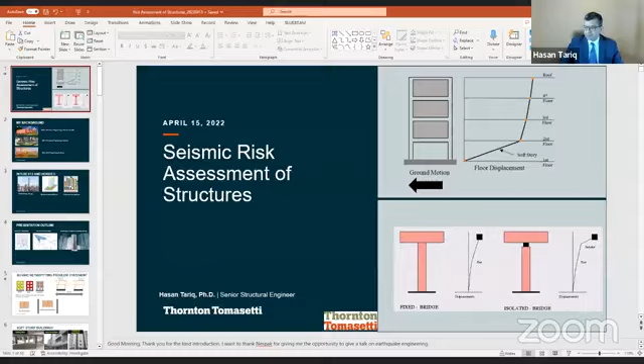I really appreciate that. I don't know if I have achieved much, but every day I think I'm learning, I'm trying to be a better engineer day by day. That's my overall goal. The topic of my presentation today is seismic risk assessment of structures.

Earthquake has been close to my heart for about the last 10 to 12 years. I remember sitting in a physics class with the professor teaching Hooke's law, and we had the Muzaffarabad earthquake back in 2005. The moment I got home, I saw all the damaged buildings, and I just prayed to God for a quick recovery.

As time progressed, I got into civil engineering and then a structural engineering program, learning more about damage-controlled buildings and earthquakes, and how important design is for improving performance and safety. I kept progressing through my master's and PhD, and furthermore my professional aspirations in structural and earthquake engineering.

So the topic is seismic risk assessment of structures. As Tahir Saab already introduced my academic background, just a quick flash here - I got my PhD from NJIT, my master's from Asian Institute of Technology, and my civil engineering undergraduate from NUST Islamabad.

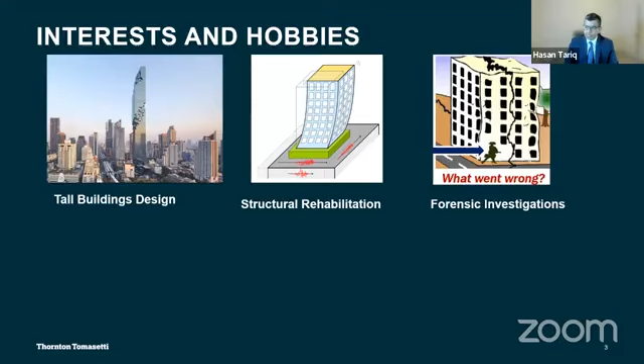So I have done work in three different departments at Thornton Tomasetti. I'm mostly engaged in the design of high-rise buildings and structural rehabilitation.

Today's presentation is divided into three main topics. I want to talk about seismic retrofitting of a soft story building, then risk assessment of base isolated bridges, and the challenges one could see in high-rise buildings. You'll see the progression as we go along the presentation.

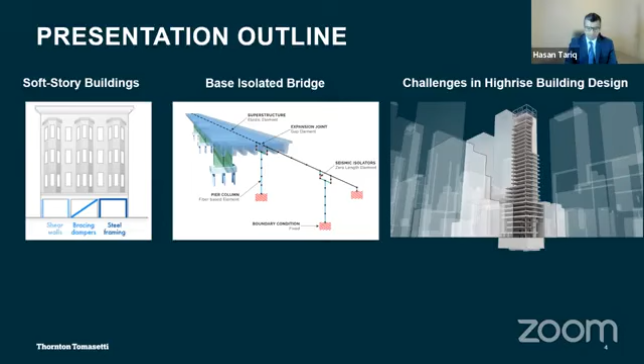So what is a soft story building? When we analyze the building - a moment resisting frame, let's say a special moment frame building - we basically consider the infill wall as a line load, and we analyze and design the beams and columns. But in reality, these infill walls have stiffness associated with them, due to which under seismic loading or earthquake, you could see an irregular distribution of stiffness along the height of the building.

Under earthquake, the irregular distribution of stiffness - due to infill walls on upper stories and no walls at the first story - causes an irregular distribution of deformation along the height of the building. The columns at the first story take all the damage, and you could see it turn into a complete collapse.

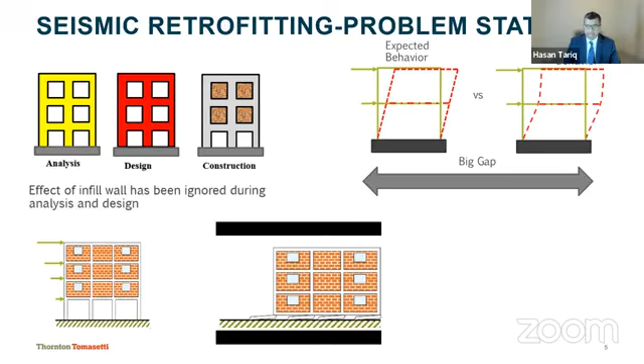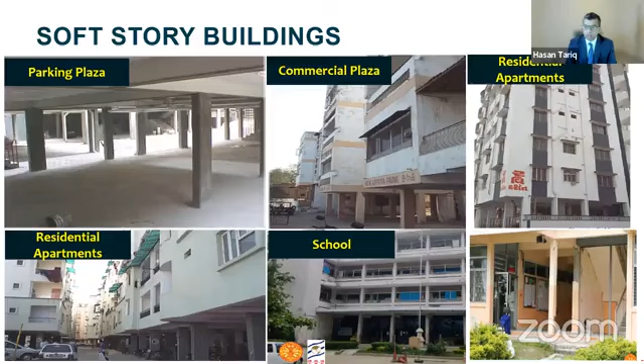Now where would we see soft story buildings? We can see them all around - commercial plazas, school buildings, residential apartments. For commercial plazas, we need the first story open for parking. For school buildings, we probably need the first story open for prayer or assembly. For residential apartments, there are leasing offices made of glass, and the stiffness of glass is much less - almost very flexible compared to the stiffness of the walls along the height of the building.

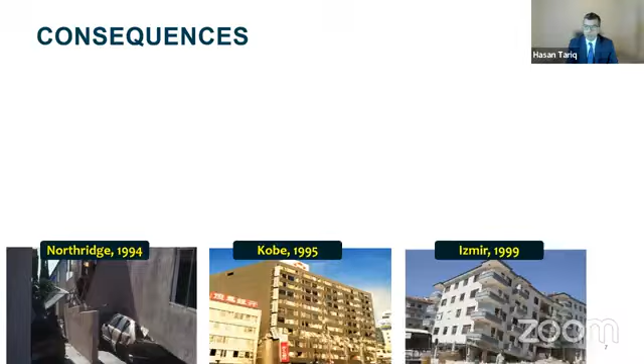Now, even past earthquakes have demonstrated that the damage due to soft story was most commonly found all around the world, which means that soft story buildings are vulnerable to earthquake and require special attention from a design standpoint.

The question is, in order to avoid the damage, should we stop constructing soft story buildings? If we say yes, we'll probably be out of business. Being a structural engineer, we need to understand the significance of the problem and how we would address it.

Soft story buildings are there. They have to be there because we can't have walls at the first story, for commercial purposes or from an architectural standpoint. So these buildings will be there. Being a structural engineer, we need to determine what we need to do in order to improve its performance under seismic loading. That's the overall idea.

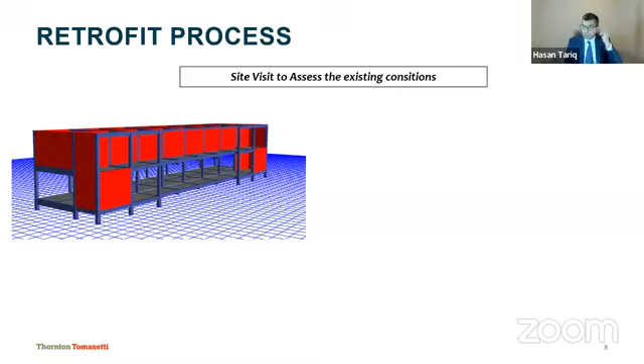Now I'm going to explain the retrofitting process. The first step, for example, if you are retrofitting an existing building, you would go to the site, take pictures, determine the geometry of the building. The second step is you formulate the nonlinear inelastic model.

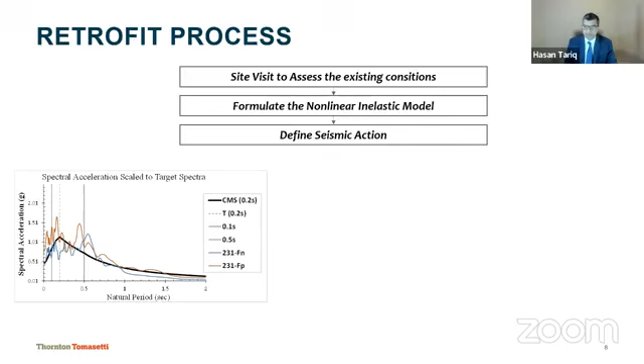The third is you determine the seismic action, which means what is the likelihood of that particular earthquake at that location. Then you determine the evaluation criteria. How are you checking your building model? Are you comparing the forces, the deformations, the strains, or the plastic rotations? You need to define the evaluation criteria.

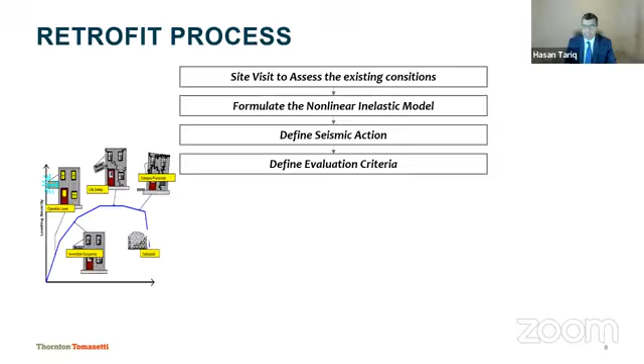And then you evaluate the performance of the case study building, and then you determine the structural deficiencies. This is a very important stage where a structural engineer will determine what retrofitting approach needs to be applied.

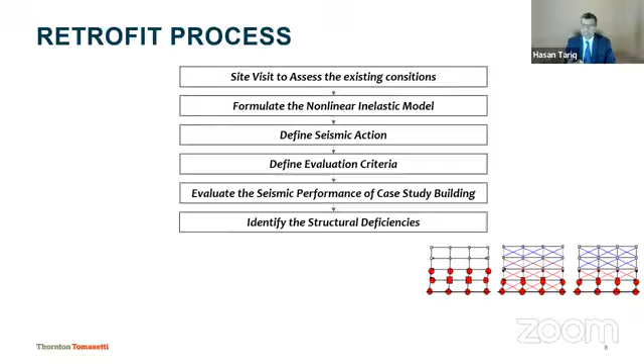For example, if an earthquake has a return period of 2,500 years and your columns only have minor yielding, meaning they're not going to collapse under the earthquake, you can't propose an expensive retrofitting approach that would over-retrofit the building and cause other damages. Here you could see in the picture that the columns have suffered plastic deformation - they're close to collapse - and that means you need to develop a certain approach that will either strengthen or stiffen the building, or both.

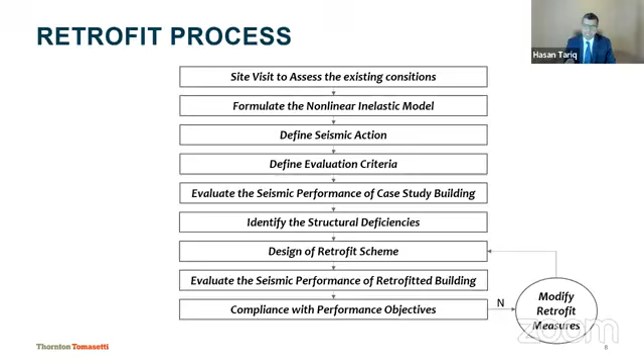Then you design your retrofit scheme based on the deficiencies of the existing building, and then you evaluate the performance of the retrofitted building and compare that with the objectives mentioned earlier. If the objectives are not being met, you reiterate until you achieve the desired objective. If yes, you proceed to the final report.

This building is located in the north of Thailand, just to give you a perspective of how far it is from New York. I worked on that building when I was working for AIT Solutions in Thailand. I flew all the way to Chiang Rai province in Thailand and looked at the existing building, which was under construction.

My question to the design engineer at that time was, if you are constructing the new building, why can't you just add walls at the first story and avoid the soft story? They said we need that first story open for prayer purposes - all the Thai students gather at that place for prayer and we can't close it. Also, you could see infill walls somewhere at the mid-height of the column, which is another topic to discuss, but you can see it can cause a hinge at that location of the column.

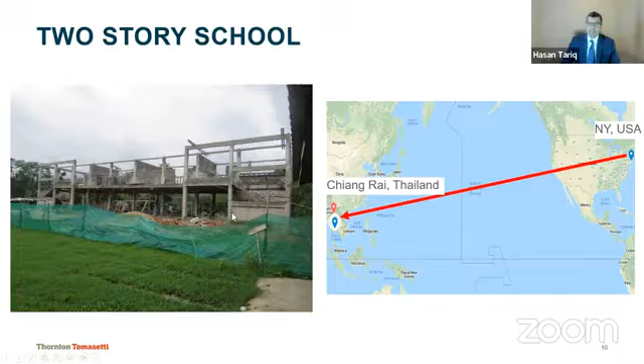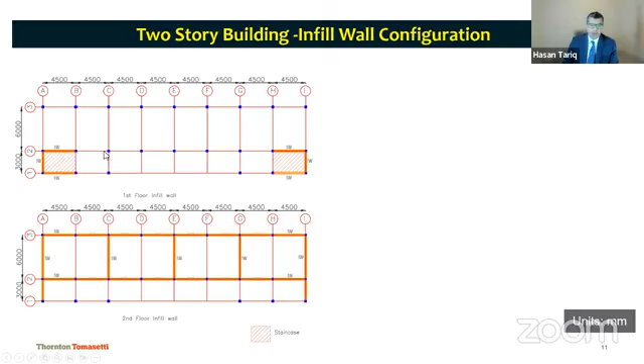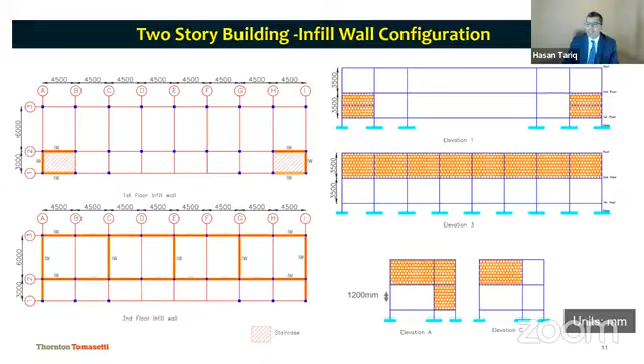Okay, so this is a plan view of that case study building. As you can see, we have infill walls at the second story all around the perimeter, and at the first story only around the stairwell. That is the elevation view on your right side, both front and side elevations, just to get more visual understanding that we have infill walls at the second story and no walls at the first story.

And then the model development stage. Once you've gathered the information, once you know the scheme of your building and what it looks like, the next step is to develop the mathematical model of that building. For this, I used Perform 3D.

Within Perform 3D, I used a fiber-based modeling approach. In that modeling approach, I assigned a nonlinear behavior to each fiber of the cross-section. At the bottom, you can see we have a cross-section fiber. We discretize that cross-section into small fibers. By fiber, I mean one small square, which is a meshing language we use in finite element analysis.

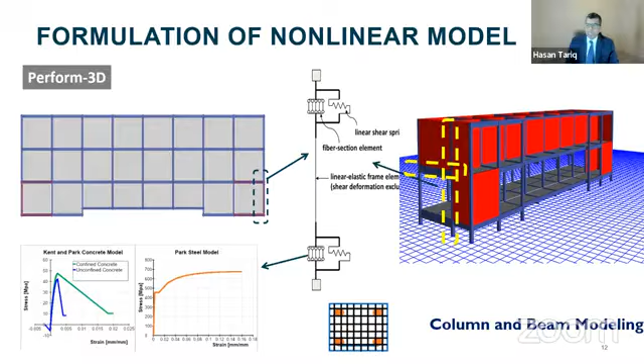Then we assign each fiber the corresponding material behavior. For a rebar, we would use a Park steel model. For concrete, we have confined and unconfined concrete material models, just to demonstrate an expected performance under lateral loading. The slabs were modeled as an elastic shell, meaning no nonlinearity was considered. The fixed support was considered at the base.

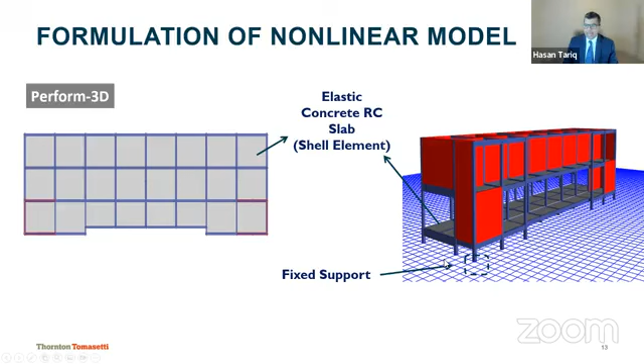In order to simulate the effect of infill walls, I used compression struts, which means if the load is applied in the north-south direction, this strut would be active and the other strut would not take any load. If the load is applied in the opposite direction, that strut would take the load and the other would not. So these are compression-only struts that take the lateral loads to simulate the behavior of CMU walls.

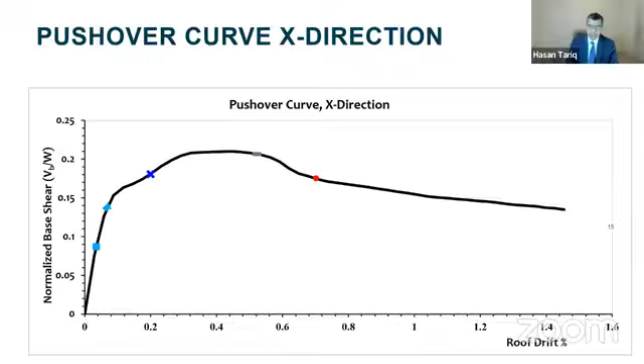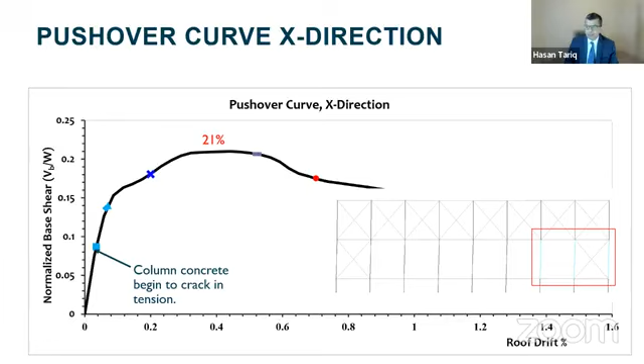This plot is a basically classic pushover behavior of the building under the X direction. These markers on the curve show various damage levels. The first marker, in cyan, shows where the concrete column begins to crack. That's expected - once your stresses exceed the cracking moment, 7.5 under root f'c, you would exceed the cracking, a very low stress level. That's one you should expect.

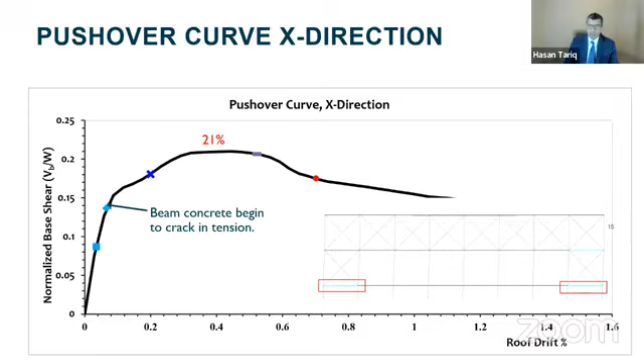The second thing to look at is that your infill walls at the first story begin to crack. The third thing is your beam at the base level also begins to crack, and then your column begins to yield. Then you would see that as deformation continues, your column begins to crush, and that's the point where the column concrete begins to spall, leading to a complete collapse.

One interesting thing to look at in this picture is that there is no damage at the second story. There is no cracking of the wall, no cracking in the beam or the column, which means that once your wall cracks and the columns are left by themselves, all the deformation concentrates here, and we have a typical soft story behavior.

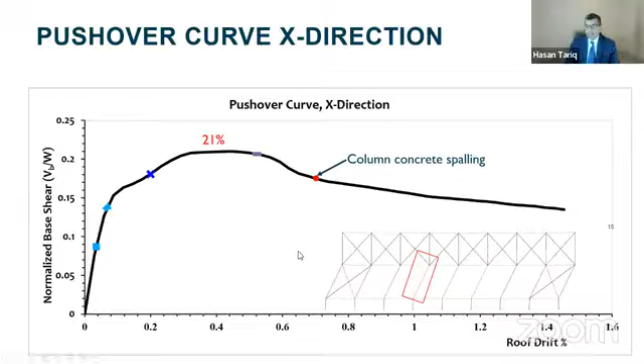Another way to look at this is to validate your expected damage along the building as you exceed your drift levels. This curve also has its own significance - here I am comparing the behavior of the building with infill walls and without infill walls. This is basically to emphasize that when we analyze the building, we do not consider infill walls, but when we do add buildings with infill walls, there is an increase in stiffness, which in return will reduce your natural period of the building.

And as per your response spectrum, a lower period will attract more shear. If you have a soft story building with infill walls, that higher shear demand will definitely cause the collapse of your first story columns. That's another way to look into it - the importance of not ignoring the infill wall, which can lead to a disaster at the end.

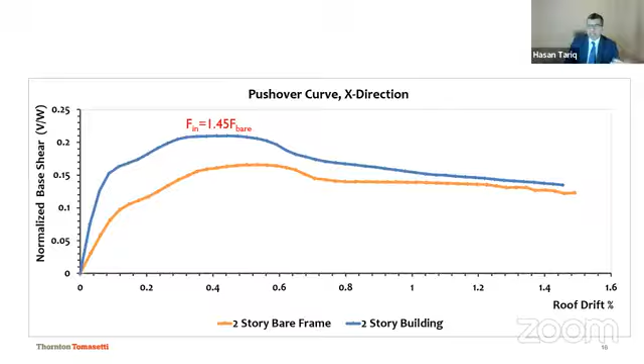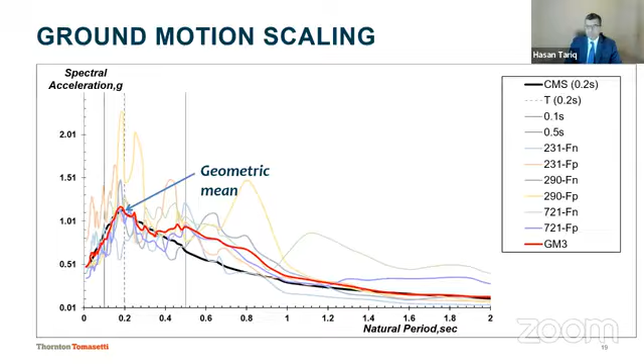Then we selected the suite of ground motions - we have fault normal and fault parallel. What we basically did was scale the frequency of these selected ground motions such that the geometric mean at 0.2 seconds coincides with each other. The reason we chose 0.2 seconds is because it's a two-story building, and 0.2 to 0.3 seconds is the natural period you would expect, and we wanted to have resonance at that time. That's the period we chose from the scaling standpoint.

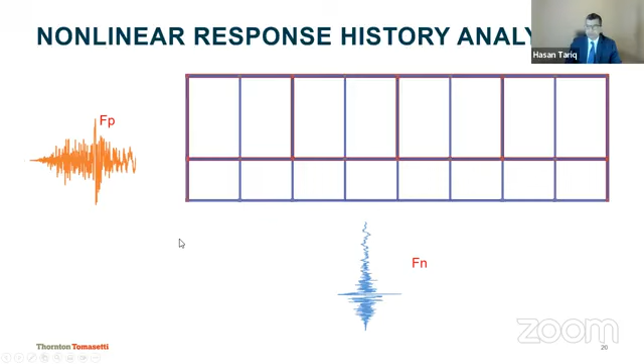What we did is we took the envelope of all the load cases, and the maximum from all load cases was considered as the demand. 5% modal damping and a small amount of Rayleigh damping were also considered.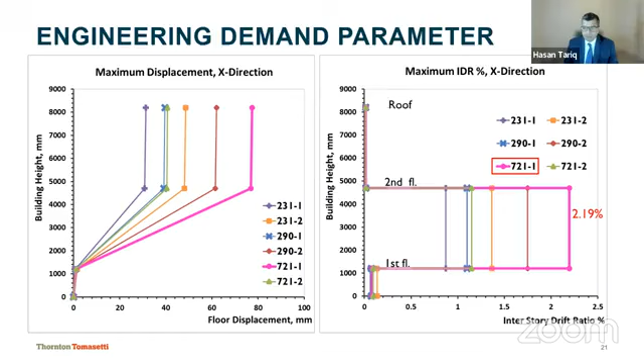From the drift standpoint, you can see that all the deformations are concentrated in the first story, and the drift at the second story is almost zero, meaning the columns at the first story are taking the whole load, which is causing the collapse of the whole building.

We also looked at the plastic rotations of the columns. I did mention that I used strain models, but I also compared the plastic rotations. I converted my strains to curvatures, and from curvatures to rotation—it's a simple mathematical formula that one can easily relate.

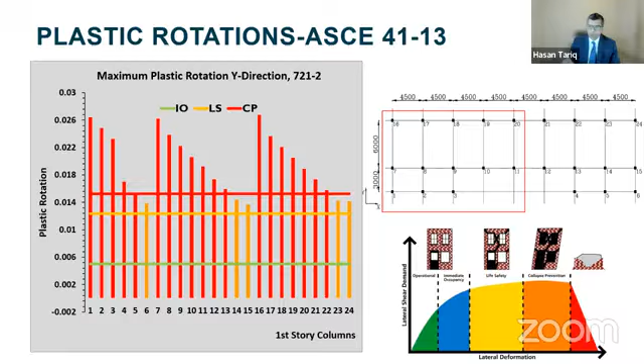The red line shows that all the columns have crossed the collapse prevention limit state, and on the plot on the right side, you can see they entered the collapse region. A few columns were in the collapse prevention limit state, and none were in life safety or immediate occupancy. In short, almost all the columns at the first story suffered collapse under the selected ground motion.

Now, what is the takeaway from my evaluation? I found that the building behaved poorly in the X and Y direction. Why? Because of the irregular distribution of infill walls along the height of the building.

The second finding was the plastic rotation of the first story columns exceeding the plastic rotation limits stipulated in the codes under jurisdiction.

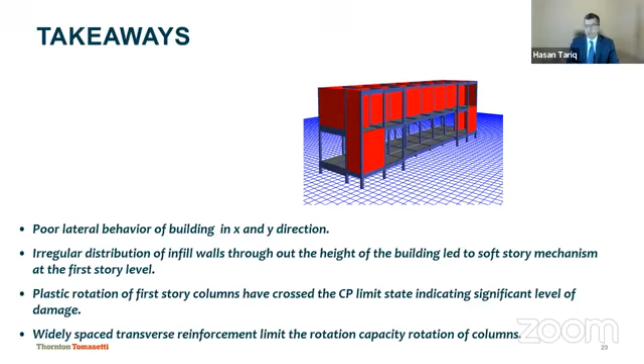When I calculated the plastic rotation, there is a role of transverse reinforcement, which basically confines the core of the concrete and improves the plastic rotation capacity. I also noticed that in the plastic hinge regions, the spacing of the transverse reinforcement was not enough—improving that could improve the rotation capacity of the columns.

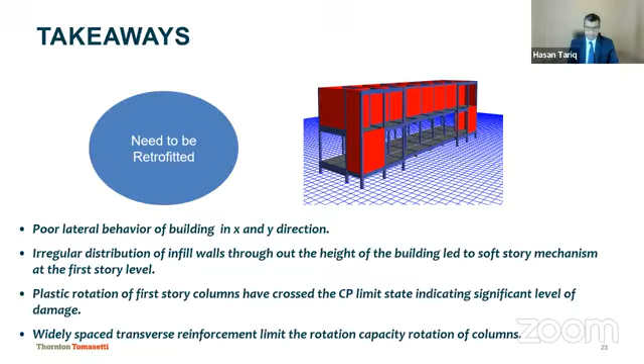So what's my final conclusion? The building needs to be retrofitted. There are many retrofitting approaches available that could be used to improve the building performance under earthquake forces.

One is the global retrofitting approach, the other is the local retrofitting approach. Depending upon the desired performance objective, one can select any approach to improve the performance of the building.

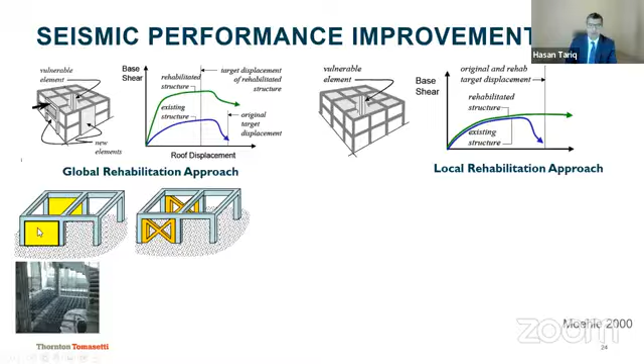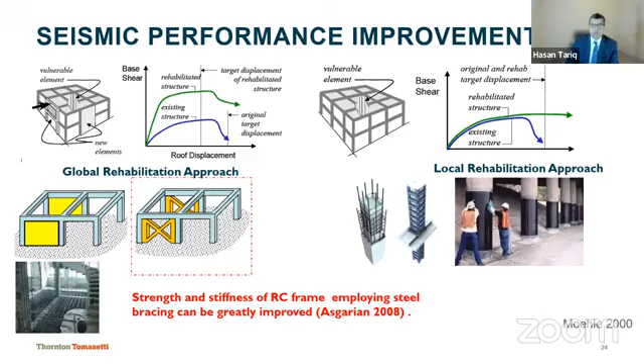In the global approach, we can have infill walls or concentrically braced frames, and in the local approach, we have concrete jacketing, FRP wrapping. We found that braces have enough strength and stiffness and can be used to improve the performance of the building, making it a more viable approach compared to other global approaches.

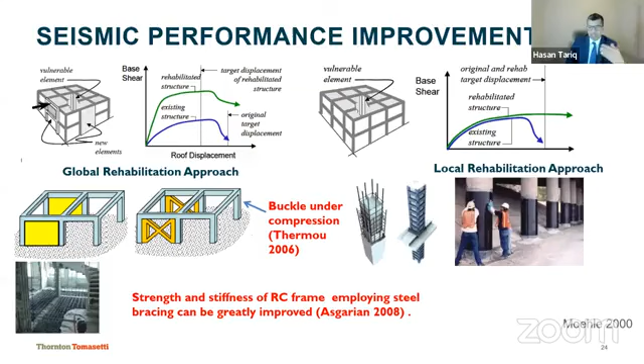Among the braces, one of the biggest issues is that braces will buckle under compression. Under yielding, it's simple—Fy times Ag multiplied by a factor gives the expected tensile strength. But under buckling, if the critical buckling load is less than the yield strength, the brace will buckle under compression, which would defeat the purpose of retrofitting.

So from that standpoint, what should we use to improve the performance of the building? I'm going to talk about buckling restrained braces. That was my master's thesis research—I developed a design methodology which I actually used to retrofit a building in the north of Thailand.

Now, the design philosophy. The question at that time was: what should be the area of the core? What should be the configuration of the core that we should use to achieve the desired objective?

The idea was we can't add a lot of strength at the first story, which could cause over-retrofitting and move the damage to a second story, potentially causing a collapse again. We need a certain level of damage, a uniform distribution along the height of the building, so we can dissipate the energy under seismic excitation.

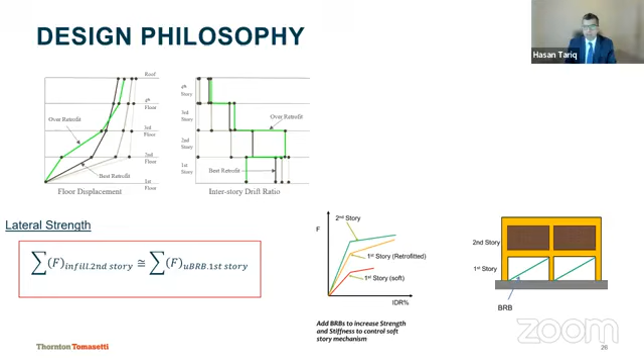From the bracing standpoint, code says you have to have at least 2 bays of braces in each direction, such that removal of a brace does not cause a reduction in capacity by more than 33%. So there were some code nuances and design approach considerations there, and another way to look at it is that we can't make the brace too soft or too stiff.

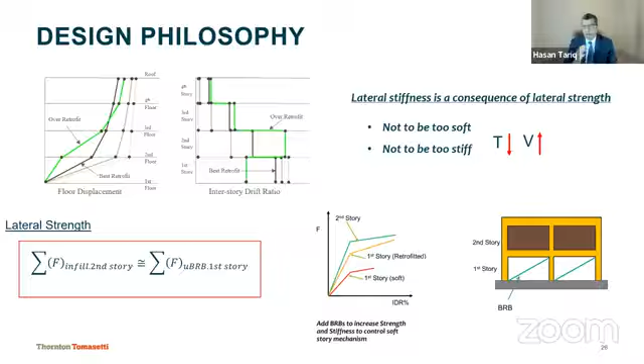The seismic design principle of that building was using the brace, because braces have higher energy dissipation capacity. But for the brace to take that capacity, I need earlier yielding of the brace, so that once it enters the inelastic region, all deformation goes there and my columns stay elastic. That's the seismic design principle.

From there, I installed the brace in an inverted V configuration on the east and west elevations, and a diagonal brace configuration on the north and south elevations.

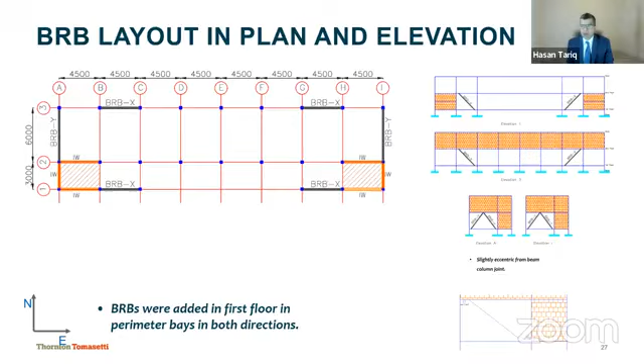I attached the brace at a certain distance away from the beam column joint, because at that location the beam column joint was not well confined. I wasn't interested in inducing more shear into the joint — if I'm saving the column, that could cause the collapse of the joint, another brittle failure. So I moved my brace a distance E away from the face of the joint, to avoid transferring large shear and tension into the column. That was the overall approach.

Here I'm comparing the story drift of two building models, one with a brace and one without. The presence of the braces significantly reduced the deformation demand in the first story building columns. On the right, you see the plastic rotations, where all columns reached plastic rotation less than the immediate occupancy limit. That means if an earthquake hits that site, the building reaches immediate occupancy — you can go back in, there's no damage, and you don't even have to repair it. That's the physical way to demonstrate the results to the client.

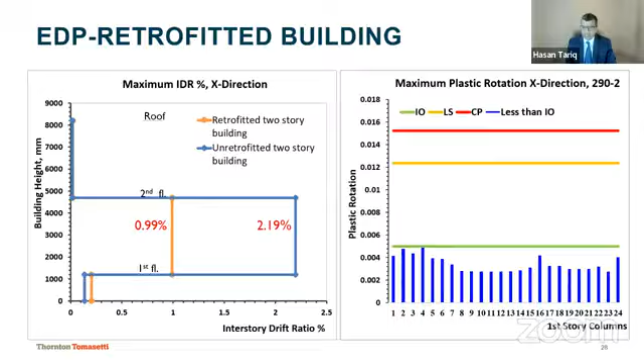The analysis didn't stop there. Because of the presence of the braces, we are adding a lot of shear into the foundations and beams. We checked that sequentially to determine if saving one thing causes a sacrifice elsewhere. We don't want that — the client doesn't want that, no one is interested in that.

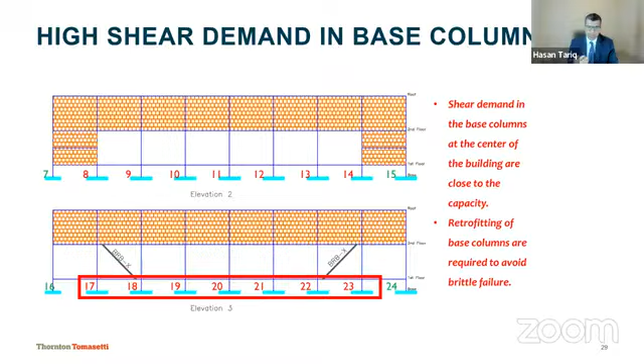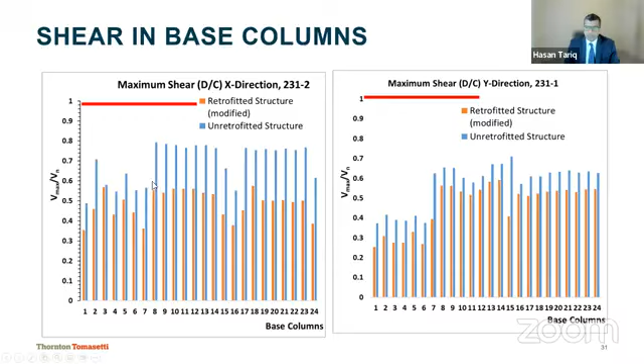I found that due to the presence of the brace, I'm adding a lot of compression and shear into these columns. We need to improve the shear capacity of these small columns below the grade beams by adding a concrete jacketing approach. I compared the shear demand-to-capacity ratios of all the columns below the grade beams, showing that in the unretrofitted building these ratios were significantly reduced by using the retrofitting approach.

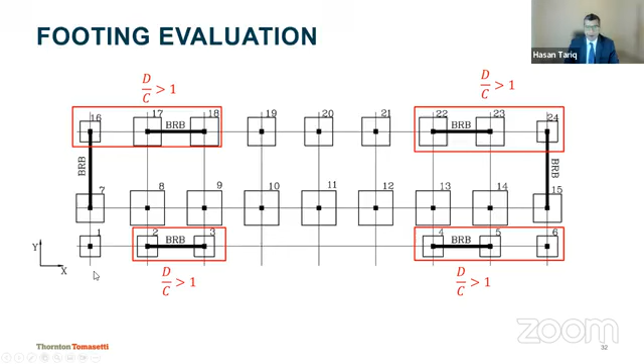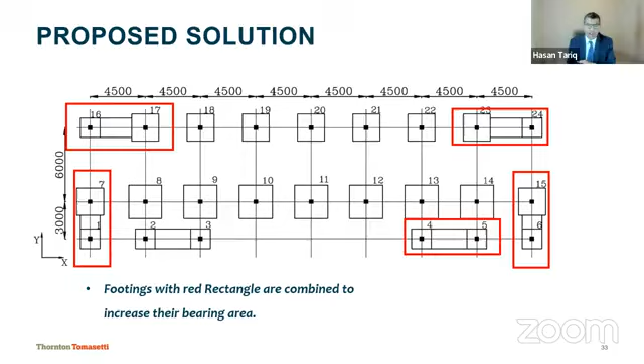I also checked the foundation, and my foundations were failing in bearing. I proposed using strap beams to connect the foundations, which increases the bearing area. That improves the demand-to-capacity ratio and the factor of safety against bearing and overturning failure, since you have uplift on one side and compression on the other, causing a triangular distribution that could uplift the foundation. If the column is saved but the foundation fails, no one wants that.

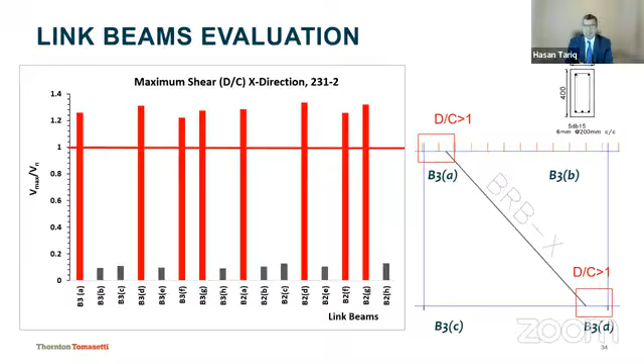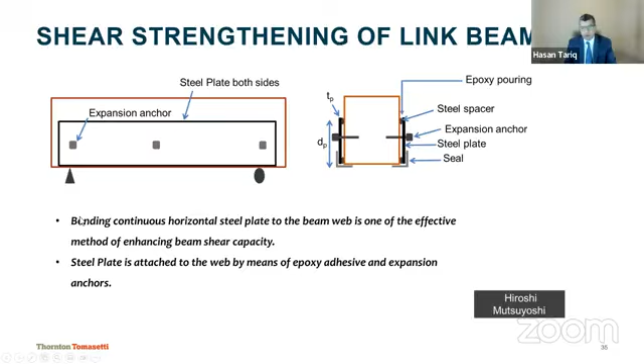The last step was to check whether the beam where I'm attaching the brace has enough shear. As you can see from the plot, the shear demand to capacity ratio of the beam was exceeding due to the presence of the brace. So we proposed having a steel plate on both sides of the beam and connecting that brace using expansion anchors to improve the shear capacity of those beams. And that's the wrap, that's the final takeaway.

As you could see, I installed the steel plate at the portion of the beam to improve the shear capacity there. I added the brace to avoid a soft story failure. I then retrofitted the columns below the grade beams to improve the shear capacity, and similarly reinforced the footing in the vicinity of the brace to improve the bearing capacity as well. So that's the overall retrofitting approach I adopted for the soft story buildings.

Okay, so that's a stopping point. Next, I'm going to move to a different topic, the collapse assessment of the base isolated bridges.

Okay, so that's the second topic. That topic is not a typical design, and not an existing building. It's basically related to a forensic investigation. What happened is related to a base isolated bridge located in the XYZ part of the world, because when we work on these projects we sign an agreement that we cannot disclose the location or the name of the parties.

As you can see on the top left, I'm calling the contractor. On the top right, I'm calling the structural designer, who is the engineer of record. So what is the story? The contractor found that the structural engineer made a significant amount of mistakes in the design of the bridge piers, meaning these piers could collapse under earthquake. That claim was filed, and the contractor requested a significant amount of design change, or an increase in money if they chose to improve the design themselves.

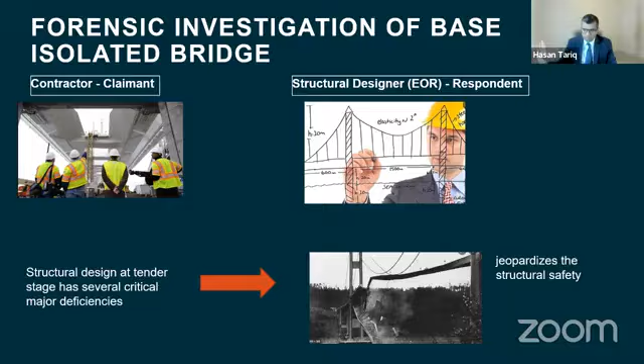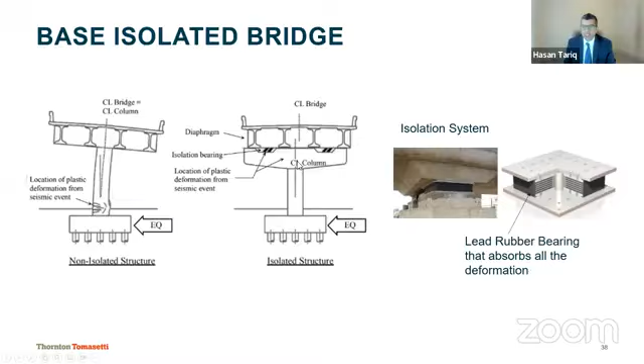So what's the nuance of this problem? A quick definition here so attendees can understand what a regular bridge and a base isolated bridge are. In a non-isolated bridge, you would displace the bridge pier under lateral loading and expect plastic hinge formation at the base of the column. The design standard would say to add closely spaced transverse reinforcement for a ductile mechanism. In base isolated bridges, the column stays elastic under seismic loading, but we add bearings below the superstructure so there is no deformation in the columns.

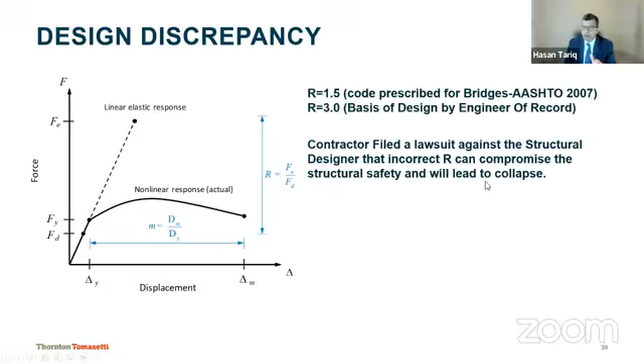The contractor found that the structural engineer designed the bridge pier against an incorrect value of response modification factor, R. This is an important design parameter for seismic design of buildings and bridges. Higher response modification factor means the building or bridge has higher ability to dissipate energy. The contractor found the design engineer used an incorrect value of R, where the bridge code says you cannot exceed 1.5 for a base isolated bridge. The contractor filed a lawsuit against the structural designer, saying that this incorrect value of R would compromise structural safety and could lead to collapse.

That drawing came to my team. I looked at the drawings, I looked at the analysis model, and then I chose to adopt the risk assessment approach to determine if the contractor is saying that if we construct that bridge with an incorrect value of R, whether this bridge will collapse, yes or no. I chose the probabilistic approach to find out the answer.

Let's dive in. I selected 80 ground motions for that particular site, developed an inelastic mathematical model that can capture all the important aspects of that base isolated bridge, and then I scaled the intensity of each ground motion such that it reaches the collapse level.

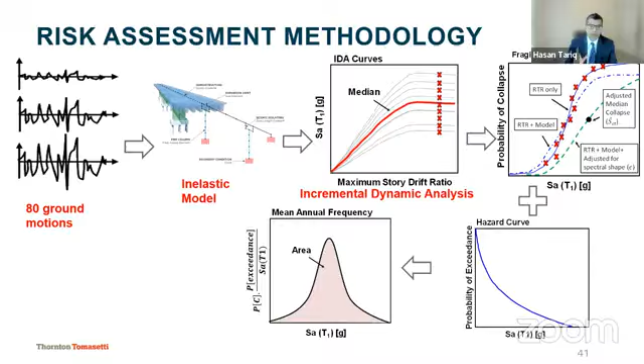So based on my fragility curve, I found that the bridge's probability of collapse is less than 1% under an earthquake with a 2,500 year return period, which means that if that bridge had been constructed with the design the engineer used, the bridge would never have collapsed. So that was my finding.

And the takeaways are: the opposing expert argued that the piers were at risk of collapse. He has effectively chosen performance limits that were inapplicable to the bridge piers. To conclude that a code deficiency is equivalent to collapse risk is to ignore the degree to which a structural element may be deficient.

Now, I'm not saying that if your design engineer or your younger staff found that my Mu is greater than φMn and you go to your boss and say, Dr. Tariq said the building is not gonna collapse, you should not avoid that.

But I'm saying that you should supplement your analysis with performance-based analysis using earthquake seismic ground motions, and then determine what is the risk of collapse. And from there, I found that the bridge is not going to collapse and has significant reserve capacity.

Of course, if that structural designer designed for lower lateral forces, he also provided the plastic hinge and detailed the plastic hinge locations of the pier such that they could take all those seismic excitations. So the end result: the case was settled, we won, and the adjudicator liked the approach we adopted.

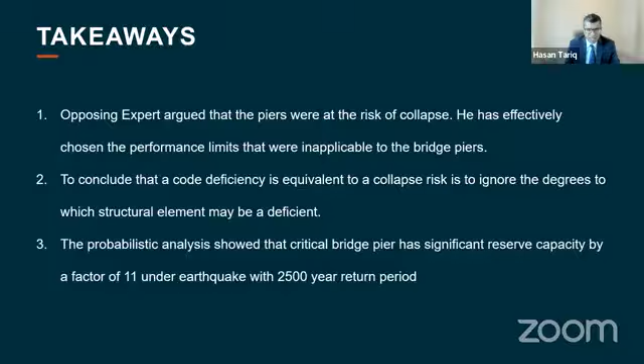Okay, so I'm gonna move now to the next step, which is basically the challenges in a high-rise building. Now, this is not related to earthquakes, but it is related to more of a challenge.

So again, I'm bound not to disclose the location of the building. One day I will, once I go there and take pictures and my name would be there. But I'll say it's a building that has started construction, located in New York, Manhattan. It's a building unique in its own ways.

The unique way is that the owner of that building wanted the building to be exposed. What that means is there will be no false ceiling that can let your pipes go through. The columns' concrete will be exposed. You will see the classic feel of your concrete with the friction. And of course, it has many other challenges.

If you have no false ceiling, that means all the MEP penetrations will happen within your beams. And if you are taking the block of concrete out of your beams, that's going to reduce the stiffness at that location. There are stress concentrations and the beam can fail down there as well.

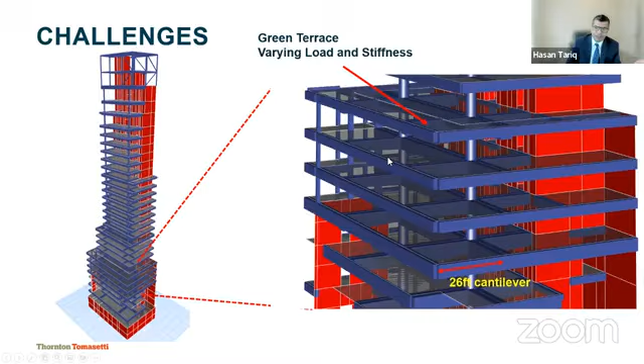That's another way to look at how our cantilevers were significantly high. One could say the stiffness is 3EI over L cube, which causes significant deformation. Also, the loads were very high as well.

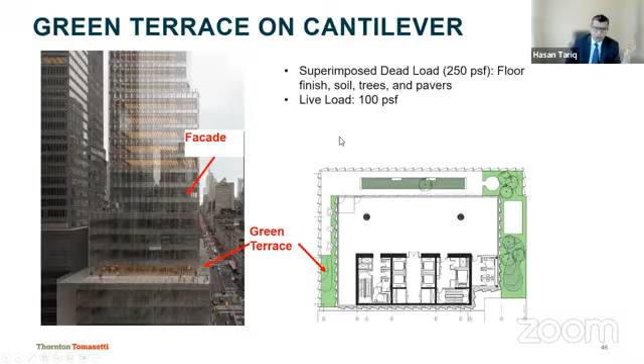So what was the challenge here? The challenge was basically the joint size of the facade.

What is a facade? As we know, probably in Islamabad, in Blue Area, the Ufone Tower or Saudi Pak Tower, and many high-rise buildings, you'd see glass panels on the perimeter. The contractor attaches those glass panels to the structural elements and has to accommodate a certain level of deformation within that joint. He doesn't want to increase the joint size because he wants people to see the shiny glass. If you're walking or driving by that building, you'll see exposed things and fancy lights, and you'd think this is such an amazing building, you want to walk inside or maybe buy an apartment if your wife convinced you to. So it's an architectural thing here.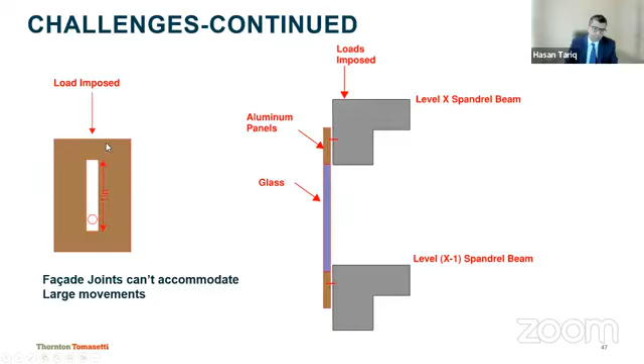That's the size of the joint. As you could see, the joint size was 1 inch, and we had a significant amount of deformation exceeding that joint size. That means it would cause damage to the glass - the glass would fall off the building because the deformations exceeded the size of the joint, which would cause failure of the facade.

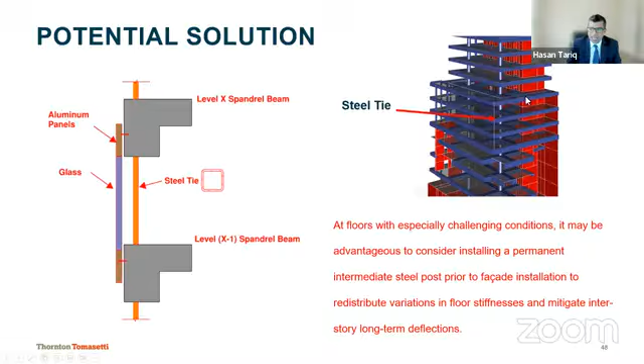So what I did was basically determine the critical locations, which were several floors, and I tied those floors with a steel tie. I'm going to show you the steel tie design from a mathematical standpoint. I considered that these floors, which are critical in nature and going to have a large amount of time-dependent deflection exceeding the joint size, should be connected by a steel tie.

How did I determine or design the steel tie? I considered that these cantilever frames are behaving as springs in parallel, where the total stiffness equals the summation of the stiffness at these 5 through 8 levels. Then I added a tie. The purpose of that tie was that these 4 floors would deform under gravity load as one rigid unit, so there would be no differential deformation - all the joints would move up and down at the same rate. That would reduce your deflection significantly and solve the problem.

Now, that was a mathematical way to explain the problem. Also, from the constructability standpoint, you want to tell the contractor what you envision, how you're bringing that theory or science from a piece of paper to the ground.

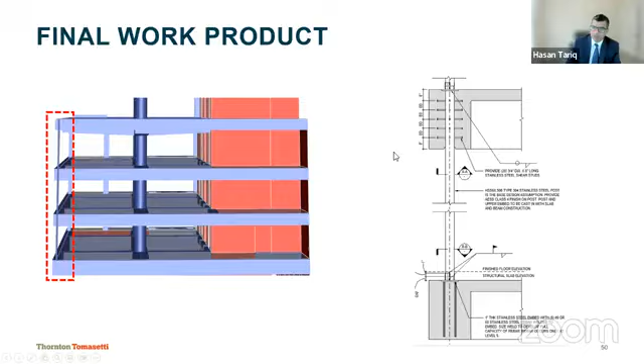So this is a quick snapshot of what we designed. We have shear studs to take the shear. We also attach that tie, which is an HSS circular column with the embed plate of your spandrel beam, and have steel rebars at the 5th floor, and the same scheme applied at the higher levels. So yeah, that's the final takeaway.

Section size is often limited by architectural requirement. That is true. Sometimes we think the beam is 18 inches deep and the architect says you can't go more than that, but you need a 24-inch deep beam to achieve your required moment of inertia so that you can get the deflection. That is not going to happen, because the client wants to see a clear spacing. Client wants to see thin, slender columns.

Long-term deflection is the biggest concern in the cantilever slabs. That's true. If you are not considering the long-term deflections, after 10, 20, 30, or 40 years, it's going to cause a crack in your concrete. The water will creep in. It's going to corrode your rebar. It will compromise or jeopardize the structural integrity.

You could also use the post-tension beam system. You can use the steel plate girders within that beam to achieve that desired goal.

So what did I talk today? I talked about 3 different things. One was code-based design. What challenges one could imagine? There were many challenges, but today I presented you with one basic challenge related to time-dependent deflections.

Second, I talked about performance-based design, where what approach you need to adopt to retrofit the soft story building, and how would you compare your deformation demand with the deformation capacity?

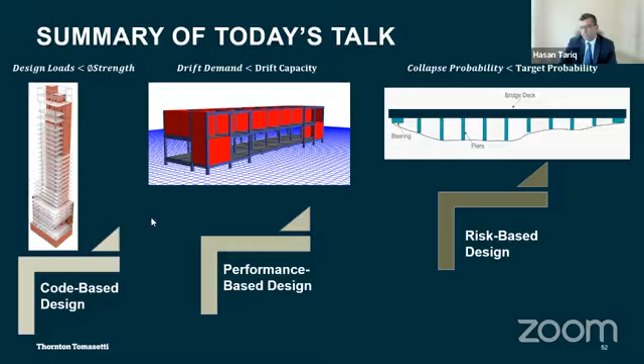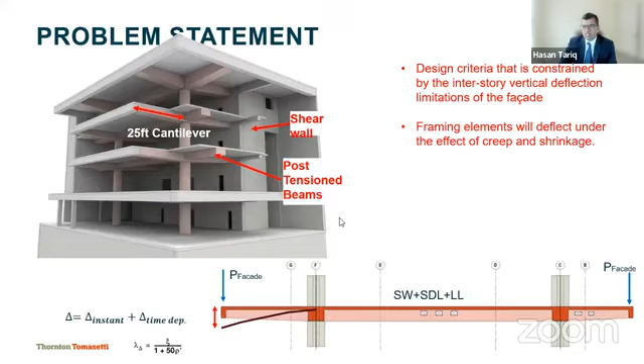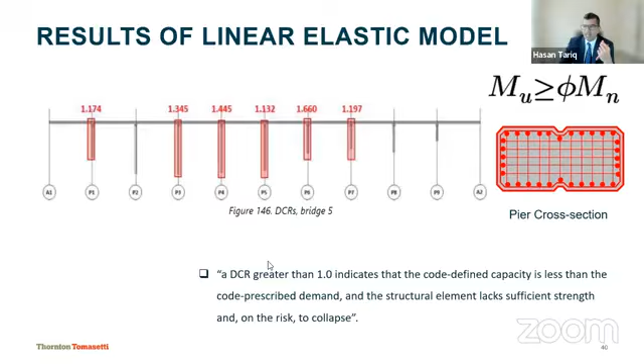That is totally true. But he was saying that this incorrect design is going to compromise the safety of the bridge. We agreed with his claim that this incorrect design is going to cause a level of damage, but does that level of damage compromise the safety of the bridge? If you look at this figure, you see that the demand is significantly higher than the capacity. But the idea was, does that higher demand cause the collapse? We agreed with his stance that of course there will be damage in the bridge piers, and that damage may cause cracking, that damage may cause yielding, but it is not going to rip apart the core and turn the whole bridge upside down. So that's how we wrote a rebuttal report in our response.

I agree with you that we were not questioning his approach. His questioning approach was correct. If I am a reviewer, I would adopt the same approach to check whether it satisfies the code provisions, and I would write that report accordingly. Thank you, thank you, yep.

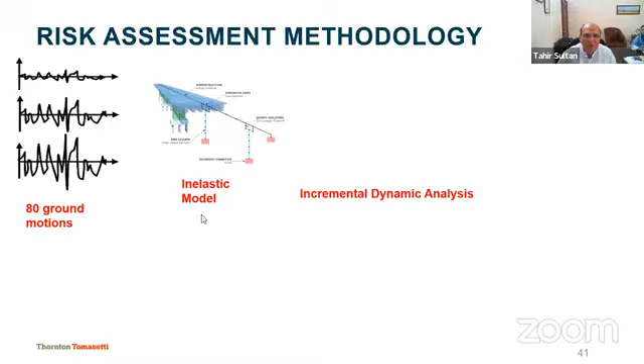Dr. Saab, your lecture was marvelous, very much coordinated with your talk, and your slides were really well coordinated. I think you went a little bit fast, as far as I am concerned. People are taking time to assimilate all you have said in such a short time, so now the questions are pouring in. It's good that they're listening. When I used to hear presentations at NASC, no one would ask questions because the topic would be difficult to understand. The general trend here is like this, but now Pakistan society is really working hard to inculcate this tendency in engineers that they should come up and ask questions as much as they want.

So let's say engineer Muhammad Inam is asking: what types of software do you recommend for a structural or earthquake engineer, being an initiator or basic learner? Before Dr. Tariq answers, Inam Saab, let me tell you that softwares are good, but it is the person behind the software who matters.

Dr. Saab, please answer. I'm going to second your thought. I preach this to every structural engineer: you need to have the ability to transfer the load from the roof of a 40-story building all the way down to the foundation by your hand. If you cannot understand the load path with your hand, the software is just a black box. You put garbage in, garbage out. You understand the mechanics, and the software is to back-check your results, to confirm the understanding you've developed.

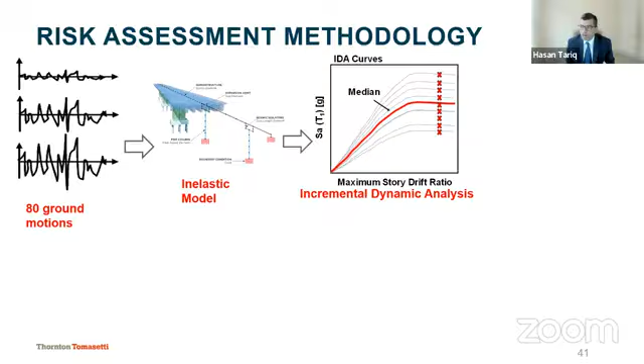Okay, thank you, Doctor. Now we have a question from a participant on Facebook, Junaid Shah. He's asking how to idealize the masonry wall in a bare frame, and which is the best macro modeling approach for defining the diagonal compression strut in order to idealize the infill wall.

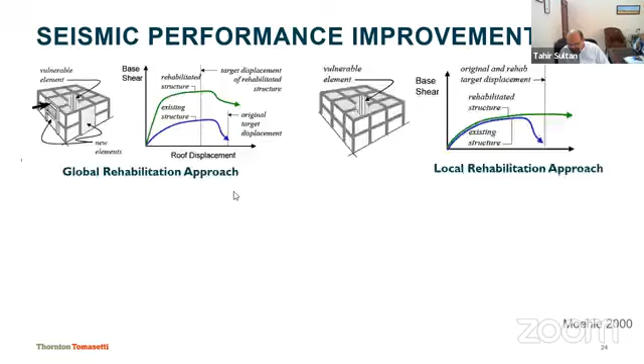I think for the compression strut, I should have said you would draw a line element. That's what it is. I also gave a reference at the bottom: 'Masonry Infill Wall Model,' an article by Decaini, 2004. The attendee can download that paper, where they explain the methodology of how you should connect the struts. This is basically a line element, and within it you assign the nonlinear behavior of the wall in each direction to simulate its behavior.

Now we have a question and a comment from Hamza. Hamza has just commented on what I said. He's saying, Sir Tahir, not...

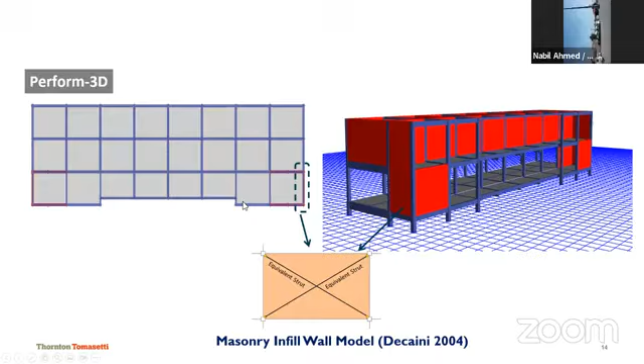Somebody did not mute his mic. I have done it, okay.

The question and comment is from Muhammad Hamza, and he has commented on what I said. He's saying, Sir Tahir, not fast, it is a very brief and interesting presentation. Just a comment, oh very nice. If you liked it, if it was not fast for you, maybe I have become old and it was a little bit fast for me. But anyhow, very interesting.

The question is, Dr. Saab, RMF has direct impact on ability to dissipate the energy. What is the maximum limit of this RMF? So I presume you are saying reinforced moment frame. We have three different types: ordinary moment frame, intermediate moment frame, and special reinforced concrete moment frame. Depending upon your seismic design category, which means the risk of the building at that particular location, you will determine the moment framing system.

That particular building was an ordinary moment frame. The reason is that in Thailand, people don't think there will be an earthquake, but that location was close to Myanmar. And the earthquake that would travel from Myanmar to that part of Thailand is basically the aftershocks, and those aftershocks could cause the damage that have caused damage in the past as well.

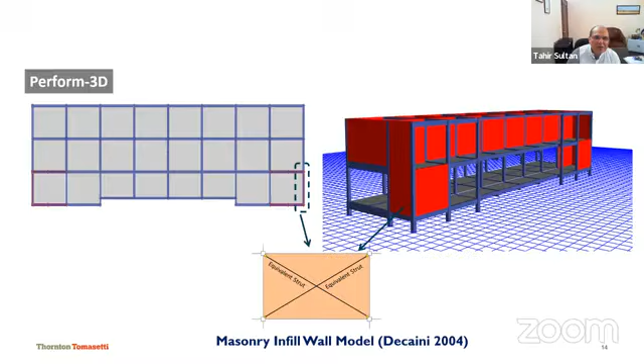Hamza, I am a geotechnical engineer myself, and I tell you that all engineers, structural and geotechnical, give importance to soil engineering. But soil engineering, as compared to structure, is still not developed to the same level. It's not 1+1=2 as it is in structure. There are a lot of empirical equations and empirical things we use in geotechnical engineering, and it's more important in structural design, especially in seismic zones. Geotechnical engineering has to play a very important role there.